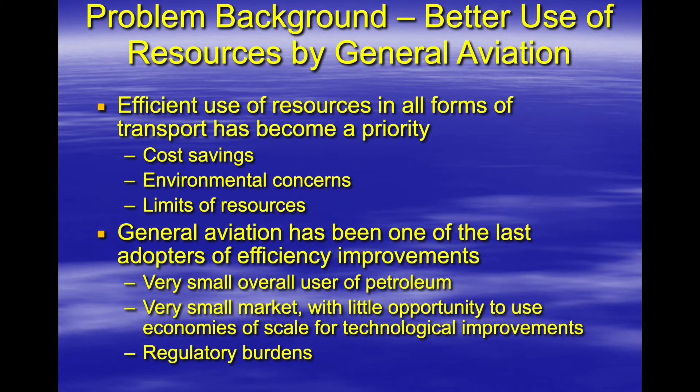But there are some more efficient airplane engines that are being worked on at this time. A couple of them, the diesel engines that you're seeing coming out in airplanes like the Diamond Twinstar. That's the compression ignition or diesel engine.

The interesting thing on the engines for this particular airplane, they're about 170 horsepower or so, but they're kind of heavy. As you can see, that's quite a bit heavier than an O-360. But the real deal on these, of course, is the specific fuel consumption, 0.38, and that's pounds per horsepower hour, the units. And it's pretty good compared to a gasoline engine, which is about 0.48, and they can even be higher than that, 0.55 or so.

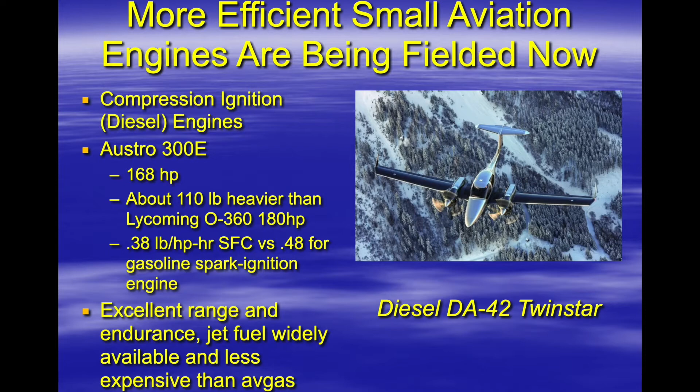Turboprop engines can be more like 0.6 and higher. So these diesels are very frugal. They have real good range, and the jet fuel, of course, if you bought that, is a little bit less expensive than aviation gasoline. So that's a real efficient engine. And there's some other really neat things coming down the pike.

Electric engines for airplanes. They will be fielded in the future, but there are many ongoing efforts to test right now. This picture here is the MagniX eCaravan. It just flew a few months ago, and that is Moses Lake, Washington, the airport there in the background. The neat thing about these electric motors is that they have a very high conversion efficiency. So of the amount of energy you're carrying, about 80% of it gets converted into power, at least coming out of the electric motor.

But the real deal, of course, is that the batteries are still really heavy for the amount of electricity they hold. If you wanted to make a comparison, a gallon of gasoline has about 34 kilowatt-hours of electricity if you do a direct comparison. But batteries that can hold 34 kilowatt-hours are about 60 to 80 or 100 pounds or more, so it's like 100 pounds a gallon. Of course, you get real good conversion efficiency, but the range is not quite there yet.

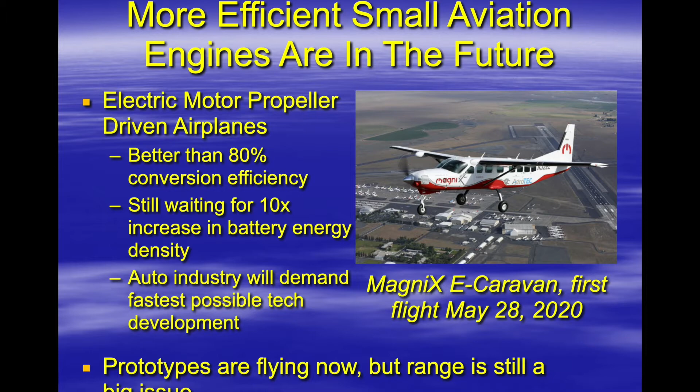We're going to see some big improvements on that because the auto industry is extremely competitive, and they're really driving to get the battery energy density up and the weights down, and we're seeing some neat changes in that. So range is still an issue, of course. They'll eventually get that.

But regardless of the propulsion engine type, you still have an engine providing torque into a propeller and providing thrust and power to an airframe. And you really need to be efficient to be able to fly these efficient airplanes, efficient pilots. And there are some flying and flight planning techniques that you can use to get better efficiency out of your airplanes in the future, and you can do it right now in your own airplane. It doesn't cost you anything. And here we go. Here's how you do it.

So first of all, when you're talking about efficiency, what is that? People tend to think that efficiency is miles per gallon. They really only look at the fuel side, but there's more to it than that. Is speed a factor? That is the question. And you fly max range, max endurance. Where's the balance there? So there was a great paper that was done by Gabrielli and von Karman back in the 50s. It's called What Price Speed. This little graphic here is from that paper.

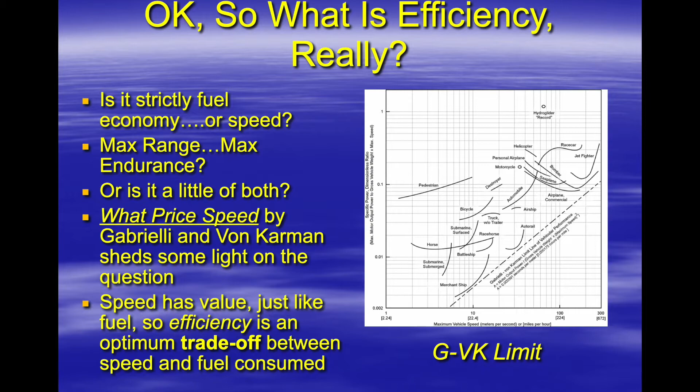The bottom line for this is that speed has value. Speed has value because of the value of time. So we actually put a value on speed, just like fuel. And so efficiency, as opposed to sustainability, is an optimum trade-off between the speed you get and the fuel that you use. So like many engineering things, there are trade-offs there. So that's what efficiency really is.

And using those concepts, a fellow named B.H. Carson published a paper in 1980 called Fuel Efficiency of Small Aircraft. And this is an AIAA paper. If you look at the chart here, a lot of you folks have seen this. The upper one is a power versus speed chart, maximum endurance at the bottom of the curve, and maximum range where the curve touches the line coming from the origin. So maximum endurance, maximum range.

Now, if you change the y-axis a little bit here and put that into thrust instead of power, you can do a very similar sort of graphical determination there. Maximum endurance is still at the same speed. Maximum range now actually comes at the bottom of the curve, as you can see. And that tangent line is now called the optimum cruise. And that was called Carson's speed.

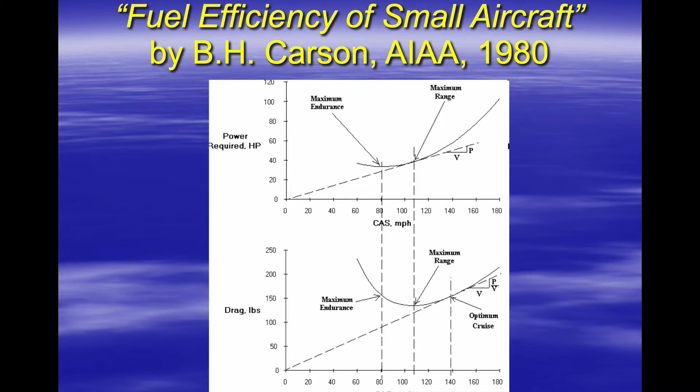There's another look at it here in a little bit larger view, and these numbers will be relevant a little bit later. Again, you have the drag or the thrust there. It's not power on the y-axis, it's thrust as a force, and then your speed. Best rate of climb, roughly, maximum range there, 95 knots or so, and then the Carson speed there. Again, is about 123, 124 knots or so. Again, that tangent line goes down to the origin. It's not shown on the graph here because we wanted to zoom in a little bit.

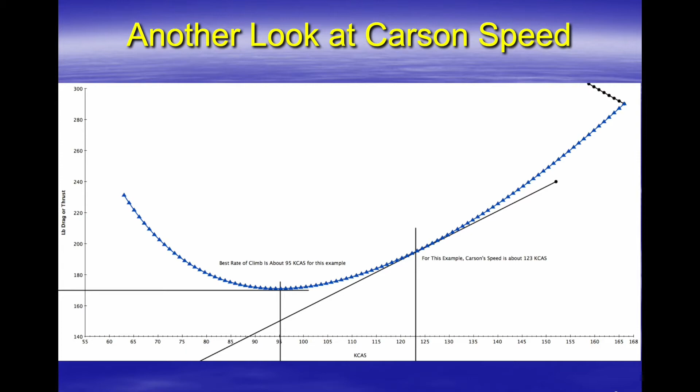So Carson's speed is basically the instantaneous airspeed where the product of your velocity and your miles per gallon are maximized. So again, these are trade-offs. As speed goes up, miles per gallon goes down eventually, at least on the front side of the power curve there. And if you maximize that expression there, speed times miles per gallon, that's Carson's speed. And he called it the least wasteful way of wasting fuel.

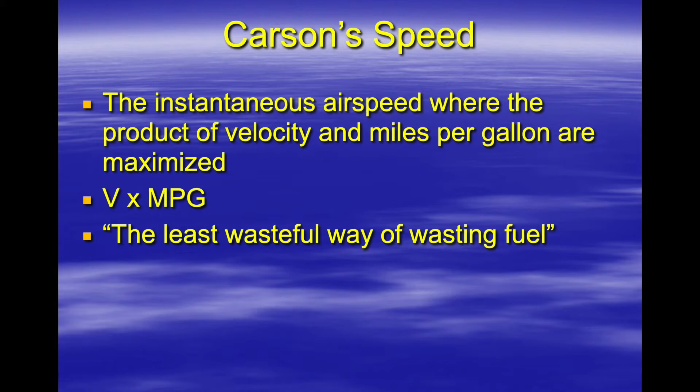And there's some other interesting relationships if you do this mathematically. Sorry, have to do it. When you raise a value to an exponent, there's some interesting things that can go on here. So if you use v to the -1, which would be maximizing the miles per gallon divided by velocity, that's your maximum endurance speed. If you maximize v to the 0, which is 1, which is maximized miles per gallon, that's maximum range, obviously. And kind of close to Vy, which is your best rate of climb, roughly.

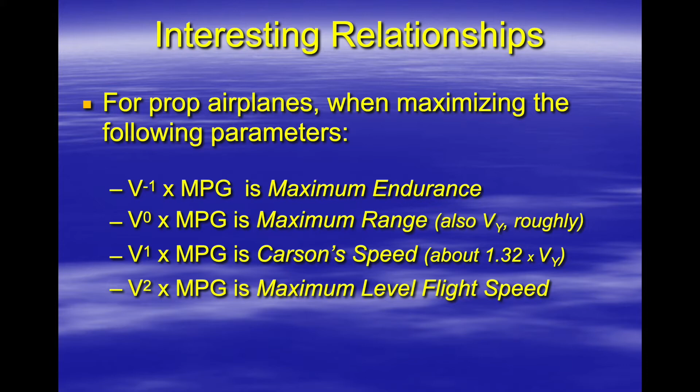It's kind of rough. Carson's speed is about 1.3 times your Vy speed, roughly. Again, that's v to the 1, or v times miles per gallon. You maximize that. If you maximize the product of velocity squared times miles per gallon, basically that's as fast as you can go, because that square term is very powerful mathematically. So those are the relationships there for those of you who like to see that.

But guess what? Most of you probably have never even heard of Carson's speed. And the reason for this is, even though this paper was published in 1980, this concept really hasn't caught on. A few people talk about it in some of the various forums. But the real issue here is that when you cruise at this speed, you're only using maybe 50 to 55% of the power in the airplane. And the winds can overwhelm that for long cross-country planning.

And your specific fuel consumption, remember I talked about that earlier, for regular spark ignition piston engines, as opposed to compression engines, that's a diesel, is a little bit lower when you're around 65% power. So if you're looking for good specific fuel consumption, again, in a no-wind scenario, about 65% power is actually where your best specific fuel consumption comes in. And of course, people will say, I didn't buy a Bonanza or a Cirrus or a Mooney or build an RV or an SX300 or EZ type to go slow. So this really hasn't caught on all that much in the community.

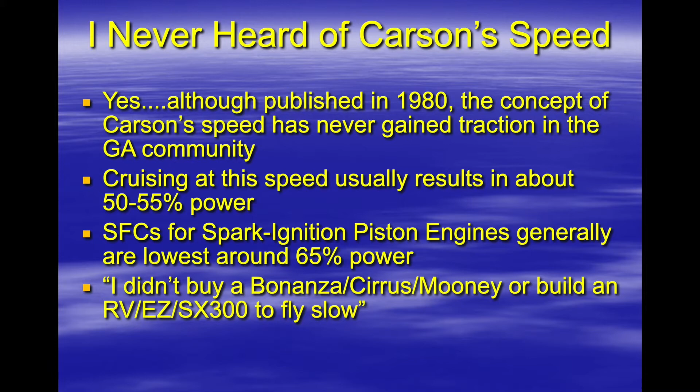So maybe Carson's speed for cruise isn't the greatest measure of efficiency, this v to the 1 times mpg. If you maximize that, you get basically lower than desired cruise power, because it doesn't work well in the real world. So the CAFE Foundation, the Comparative Aircraft Flight Efficiency Foundation, if you recall, was formed in the early 1980s by Dr. Brien Seeley out in California. They ran a whole series of efficiency air races and did a bunch of other flight research. And they spent a long time thinking about this efficiency issue.

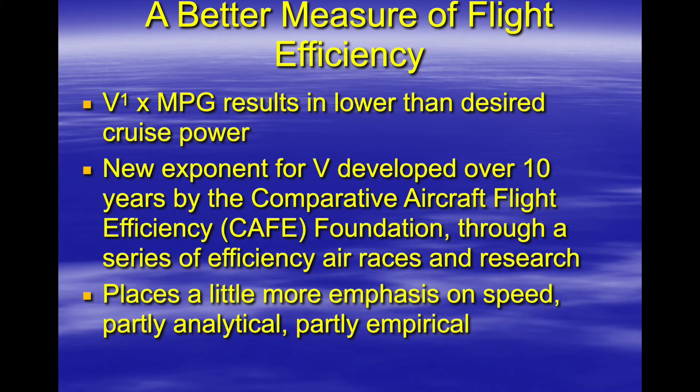And they came up with a different exponent for this velocity term, that put a little bit more emphasis on speed. There's a real long derivation of it. I won't bother you with it, but part of this is analytical, part empirical. At any rate, here it is. So the CAFE parameter, when you're looking at the efficiency of an airplane, the number you want to maximize is your velocity made good raised to the 1.3 power times miles per gallon. This is the measurand of efficiency. If you can maximize your CAFE parameter, that's your best efficiency.

And the reason you use velocity made good is that's the actual speed that you get between your departure and your destination, because what really counts is point to point. Instantaneous velocity is nice for theoretical people, but we're flying airplanes to go from point A to point B a lot of times, and so velocity made good is a better term here, and it allows you to evaluate a flight for non-constant true airspeed, and it also allows you to evaluate a flight for winds. Because as I said before, flight planning for your cruise has a huge impact on the overall efficiency of your flight.

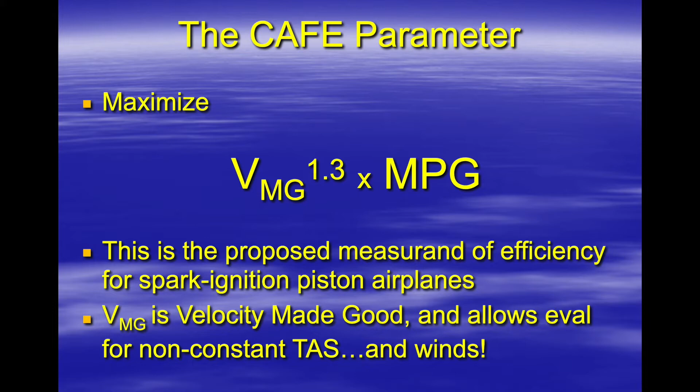So Carson speed still has merit, though, but not really as much as a cruise speed. My idea to come up with this for my master's thesis started from this book here, Logic of Flight by Jack Norris. He talked a lot about cruising at Carson speed, and again, we've shown that that's maybe a little bit too slow. He also talked a little bit about climbing at Carson speed, but he said basically climb until the airplane won't climb anymore.

And he also didn't really discuss any considerations for cross-country planning with respect to winds. And that all really needs to get into the thought process. So when you're flying at Carson speed, you're using about 50 to 55% power for moving forward, as I said before, but then you use all the rest of your power for climb. And you don't want to fly this 25 square thing. People get taught about that. I'm going to show you later on that it really hurts your efficiency, and I'll show you that here in a little bit.

So, rather than climbing until the airplane doesn't climb anymore, what I thought I would do is put a performance limit on there and actually make this climb a profile instead of just a constant speed. And this is similar to what we see in some of the larger airplanes. And the nice thing about changing your profile when the airplane reaches a climb performance limit is that the airplane tells you when you need to make a little change in your climb profile. You don't have to do any computations for different weights, or if it's hot or cold, or if you have winds or any of that sort of thing. That's different from what Norris did, and added quite a bit to the definition.

So as you recall from your training, there's a couple of FAA-defined V-speeds. VX, of course, is the best angle of climb, and that's the best climb that you get when you're flying your airplane to go forward. And VY is best rate of climb. That's the best climb per unit time. So distance-based for the first one, time-based for the second one. So now, logically, we would go to VZ. VZ is currently an unassigned term in FAA vernacular, and so I claimed it in this paper in order to represent the best efficiency of climb. So it's a climb profile. It's not really a constant speed, and here's how you do it.

VZ is about 1.3 times your VY at your maximum continuous rated power. No 25 square, as much as you can get out of the airplane in its certification basis, that's what you use. And now here's where the performance limit comes in. You climb at this speed until the airplane will not climb any faster than 500 feet per minute. So then you change from a constant speed climb to a constant vertical velocity climb. So you maintain 500 feet per minute climb. While you're doing that, the speed's going to slowly decrease a little bit. And then when the speed gets to whatever your VY speed would be for that altitude, then you just maintain your VY and climb at that. So it's a profile instead of a constant speed.

And here's how you manage the power for your normally aspirated engines. You use the target EGT method of mixture management for most efficient operation. In a nutshell, you take off at sea level full rich, and then around 2,000-3,000 feet or so, and every 1,000 feet thereafter, you lean the mixture a little bit in order to go back to the same EGT that you see on a sea level standard day, and that way you lean just a little bit and climb. If you search on that term, target EGT mixture management, you'll find a number of good presentations on that. But that's how you get the most efficient operation.

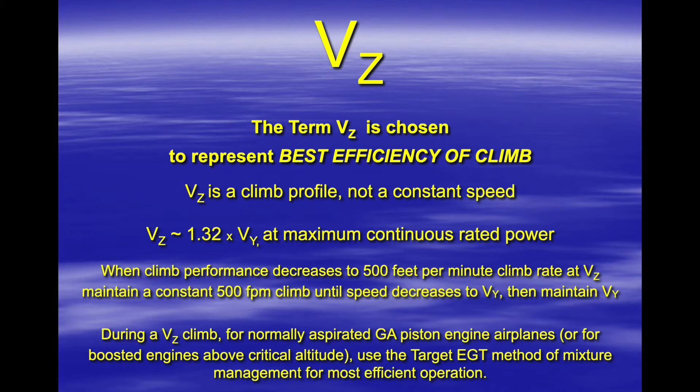But it doesn't really make any difference there. There are three things that have to work for this to actually be a useful term. One of them is technically rigorous, so it really is the most efficient climb, and use the CAFE parameter that I talked about before to evaluate that climb. And then, can you define this climb in regulatory language? And then, can it really be flown by ordinary pilots?

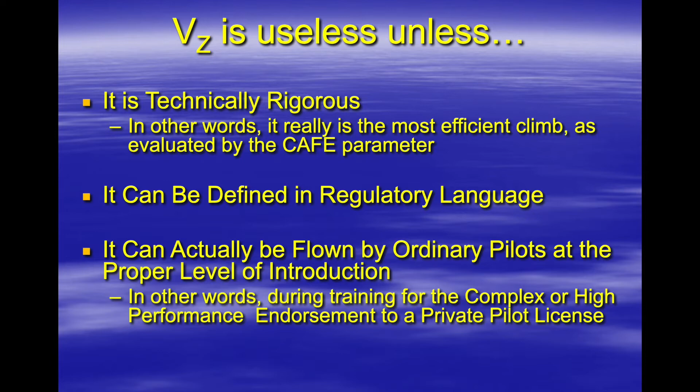The idea for this is you would introduce VZ in flight training at the time that you're going to get your complex or high performance endorsement for a private pilot license. So the difficulty of this particular maneuver has to aim at that population. So that's the idea there. So we need to satisfy all three of these things for this to actually be a viable concept.

And when I was working on this project, this was where I really ran into some problems, because it'd be nice to have a computer model or simulation of airplane performance that could account for this profile change. And the more I looked into it, the more discouraged I got, because it was a very difficult modeling problem. Charts don't really work. Even some spreadsheets that I'd seen didn't really account very well for propeller performance and efficiency.

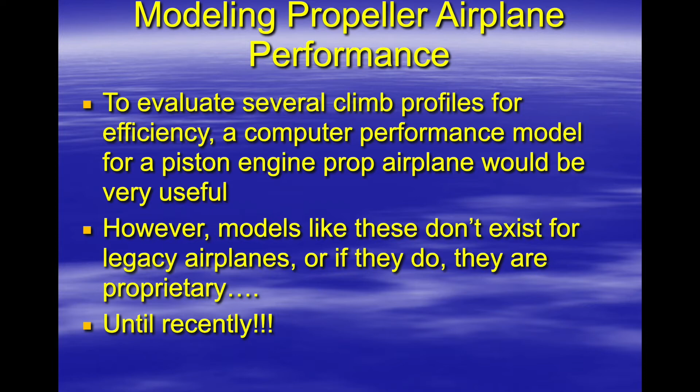So Benchmark was written by Alfred Scott. He's the president of Sequoia Aircraft Company, the guys that came up with the Falco airplane, as well as the Sequoia, which was a kit built similar to the Falco. A couple of consultants on this program: Finn and Dorothy Taylor are legendary in flight test circles. They were the primary flight leads on Mooney, working with Roy LoPresti back in the 70s, doing flight tests. Huge history. They're giants in the industry.

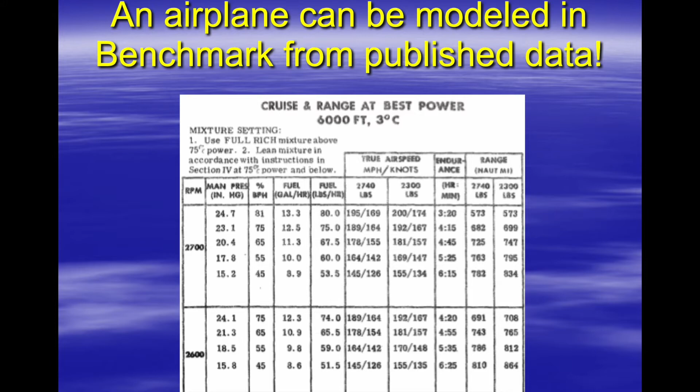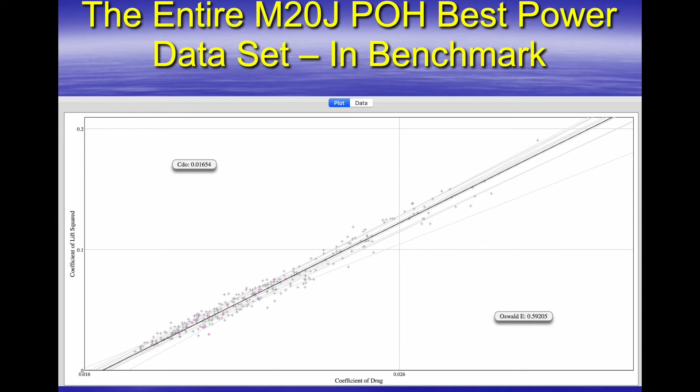So here's all these numbers, and people normally don't look at all this, but I grabbed all of them. In fact, the entire pilot operating handbook, every line of data I put into Benchmark, and all those little pluses are a line from the POH that have been put into Benchmark and then result in a drag and lift curve that you can use in order to predict performance. So at any rate, that's what that is. The line there kind of is the best fit to the data, and that was a lot of work.

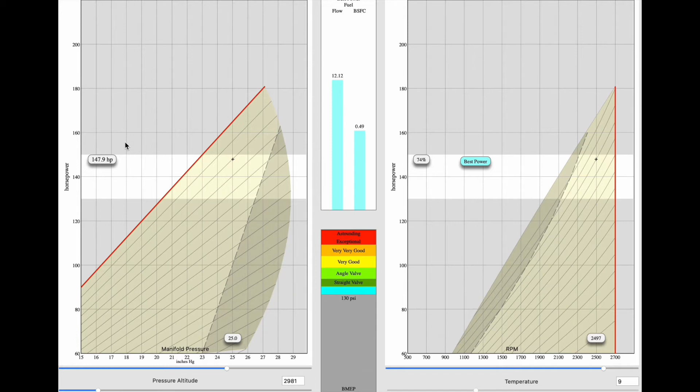I got about 148 horsepower. So before, climbing at 3,000 feet, I had 180 horsepower going into the prop. Here I've only got 148. Now let's see what happens when you go to fly the prop. Okay, here is the prop now. Again, this is modeled from a Mooney. It's a McCauley 2-blade propeller. You can see where the cursor is pointing there in the lower right.

That's your 148 horsepower going in, and I'm climbing at best rate of climb. That's 86 knots indicated airspeed. And now we're going to see what happens here. At 3,000 feet, there's 2,500 RPM. About 77% efficiency on the prop, but they're at 86 knots. There's the percentage. And you see now my 200 horsepower motor is only putting 115 horsepower in the prop.

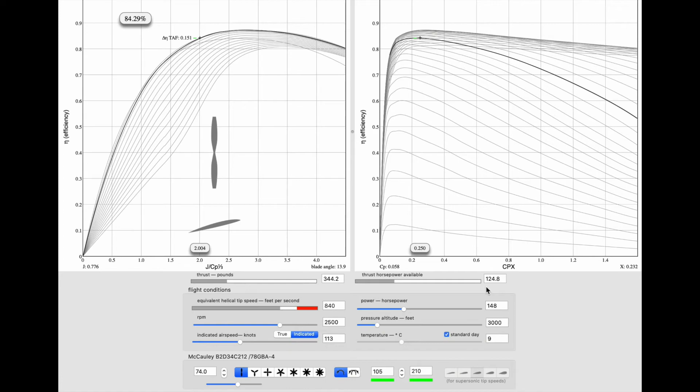If I increase to the VZ profile there, 113 knots, I get a little bit more power. It's 125 or so, but it's not 150. And that's what the guys are seeing climbing out at the higher speed with full power. So again, 200 horsepower airplane. You're at 3,000 feet climbing. If you're wide open at 2,700 and you're flying a VZ profile, again here for the Mooney, 113 knots calibrated, you're getting 149 horsepower out of the prop.

If you're a 25 square guy and you're slowed way down at your VY trying to climb, you're only getting 115 out. If you speed up a little bit, you're getting about 125 horsepower out. But your rate of climb isn't very good here because, again, you use about 50 to 55% power to move the airplane forward at 113 knots. And in this case, this would be about 110 to go forward. So you're only climbing with about 15 horsepower. So basically 25 square just destroys your low altitude climb performance.

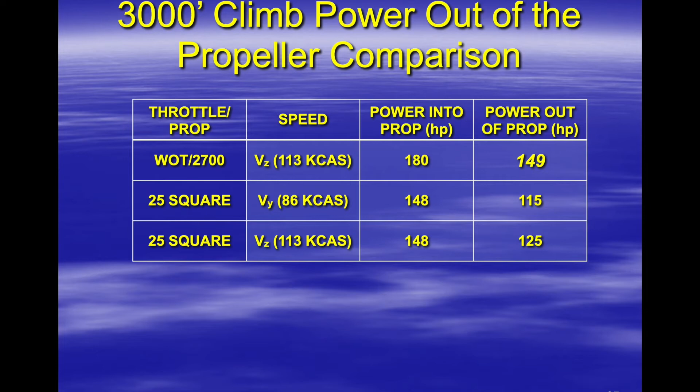And I would advocate, if the airplane certification basis allows, use full power for climb. And if you have trouble with overheating, then you should look at your cooling baffles and how you manipulate your cowl flaps if you've got those. At VZ, you shouldn't have as many cooling issues because you're quite a bit faster than the certified limit. For the experimental guys, you may have to work a little bit. Hopefully you don't see overheating, but this is kind of where you want to go.

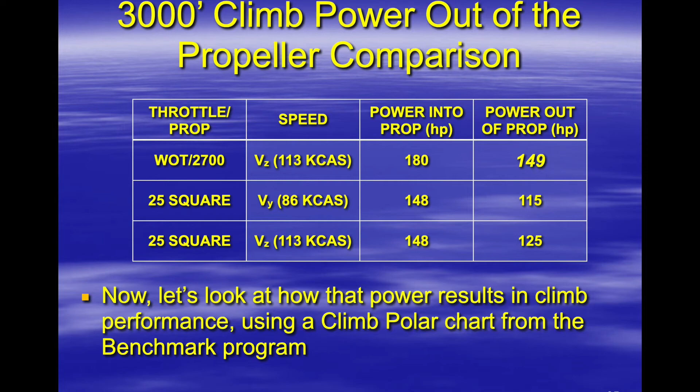So let's look at this. Let's see what this power does for climb performance. And now we're going to look at a chart that Benchmark produces called a climb polar. A lot of people may not have seen this before, but it is in your pilot operating handbooks if you have a certified airplane. I'll show you that here in a second. So this is the climb polar. This is an interesting chart: time, distance, and fuel used to climb.

And when you see that there, the bottom is either time, distance, or fuel used. The y-axis there on the left is altitude. And if you look where this little blue plus is on that big curve, that's the target altitude there. That's showing 8,000 feet. There are some mini charts here. So this airplane right now is at best rate of climb speed, full power, in a Mooney.

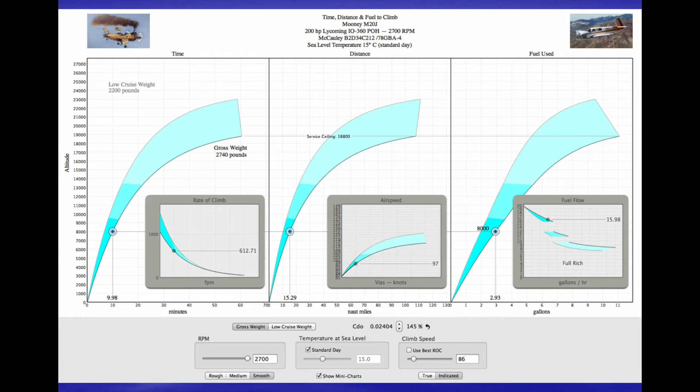If you were at best rate of climb speed, or actually a little bit faster here, at 8,000 feet, you can expect to be climbing about 600 feet per minute. And this particular data would be discernible from the pilot operating handbook, but it only gives you this one speed. It doesn't let you really change any of the other parameters.

This is a close-up of the time to climb chart. Again, 10 minutes to 8,000 feet, and your rate of climb when you get there is about 600 feet per minute, so you're still climbing a little bit there. The lower curve there is at maximum gross weight, and the upper curve there was when you're lighter. You can obviously climb faster, so it's a little bit different curve, and all your different weights kind of lie in between there in that blue arc.

Now, I was curious how accurate Benchmark was with respect to the published data for the Mooney. So what I did is I superimposed this chart at the same scale to the chart that's in the Mooney Pilot Operating Handbook. And as you can see, it's almost an exact match. If you can see underneath there the chart from the Pilot Operating Handbook, it starts to diverge a little bit above 13,000 at gross weight.

And the line for Mooney there, from the book, is 2,300 pounds, the upper one, and then the big line that goes above that's 2,200. So you can kind of see where those would fan out. This tells me that Benchmark was pretty darn accurate and does match the published data for that model. But the cool thing about a model versus a chart is then you can manipulate it just like we were flying the engine and the propeller earlier. So that's what we're going to do now.

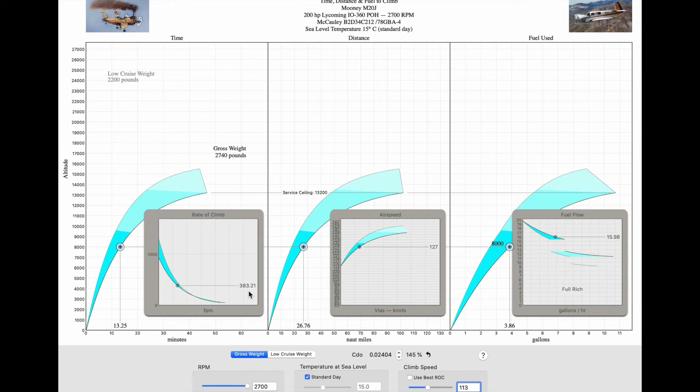So I'm a little bit low on the VVI, so I should lower my altitude here to predict where I'm going to transition from climbing at 113 knots to climbing at 500 feet per minute. And in this case, you can see it's right around 6,000 feet or so is when I do this transition. So that's a big deal there. And again, you think about the constant airspeed climb, then a constant VVI climb when you see 500 feet per minute.

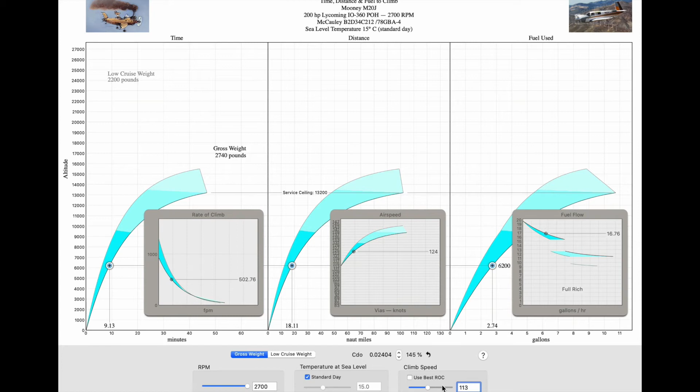Now, the neat thing about this is I don't have to do any flight tests for the calculations in order to prove that I have the efficiency from this profile, because I can do this by model. And I can run all kinds of predictions with this model just by manipulating these charts. This particular capability never existed before this project. No one had ever done it before. In fact, it wasn't even in Benchmark, and I worked extensively with Alfred Scott to develop this capability in this program, and it's really cool.

So basically then I could figure out time, distance, and fuel for a profile using this model, and then start looking at baselines and get a prediction on how sensitive this technique might be for actual pilots to fly. So you run the profiles, figure out how far you go, how fast you got there, and how much gas you used, and then use that to compute the CAFE parameter.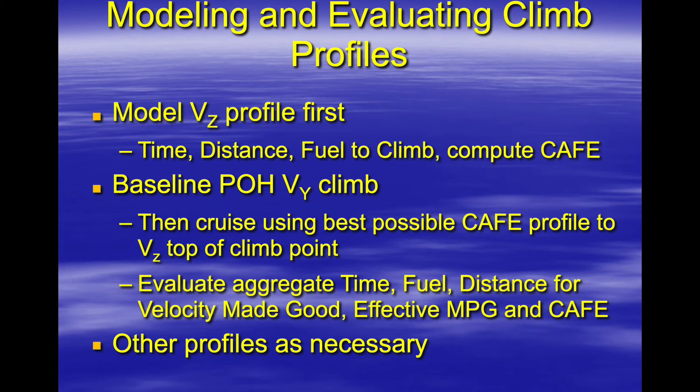It took from near sea level to 8,000 feet. Actually, this is a model 0 to 8,000 foot climb. So standard day, gross weight, Mooney, 0 to 8,000 feet. It takes 12.8 minutes to get to 8,000 feet. You go 25.5 miles downrange.

You use 3.4 gallons of gas to use it. There's your nautical miles per gallon. And then remember, CAFE parameter is the velocity made good times the MPG, in this case, nautical miles per gallon. So that's the score, 3812.1.

Now, if you follow the POH, you fly at VY at full rich. Take you 10 minutes. Remember that? We saw that. 10 minutes to get up there, 2.7 gallons, and you go downrange 14 miles. Okay, but you're only 14 miles, so you need to get back to the same point in the sky as the VZ climb. So now you just cruise down there.

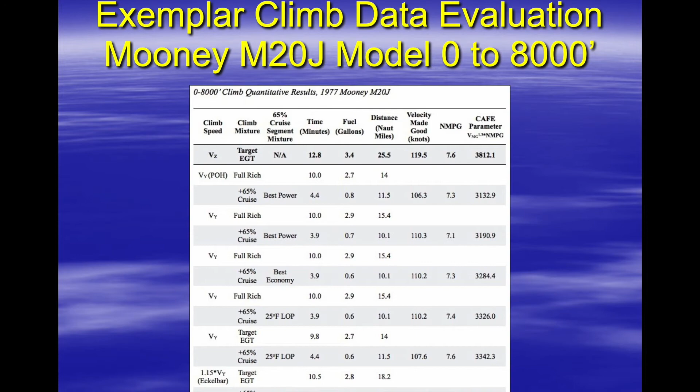And so what that immediately shows is that the technique is a little bit less sensitive to speed. So you don't have to nail the speed. And in fact, if you fly that speed pretty close to what you would expect a student getting their complex rating to fly to, which would be +10 and -5 knots, that's in the ACS, the Airman Certification Standards, you'll still get the results that you're looking for. So that really is neat, because now it can be acceptable in a regulatory sense, because you can still get really good results and still apply it to that pilot population.

But the next real question is, is this profile really flyable? You don't want golden hand test pilots to be the only ones able to fly this thing. It's got to be flown by a private pilot that's going for a complex or high performance rating. So the idea here is, once I got all the models done and the regulatory stuff, is to actually go do a flight test, and the flight test would anecdotally gather some performance data. But the real thing is more of a flying qualities and workload evaluation. Is this really flyable by an ordinary pilot with ordinary skill?

The Cooper-Harper rating scale is a practice used in flight test to evaluate flying qualities. In a nutshell, you have a task, and if you're really good at it, you can meet a desired criteria for performance or accomplishment of the task. And then if you're adequate, that means it's kind of hard to do, but guys can do it. And if it's completely unsatisfactory, you can't do it at all, and those are the lower scores.

So a 1 is the almost impossible good rating. A 3 is pretty good. When you get to 4 to 6, it's not quite so great. But the adequate criterion basically is, can you maintain your speed +10 and -5 knots when you're flying your VZ profile? And that points exactly to the Airman Certification Standards. So is that flyable? Can you maintain that speed?

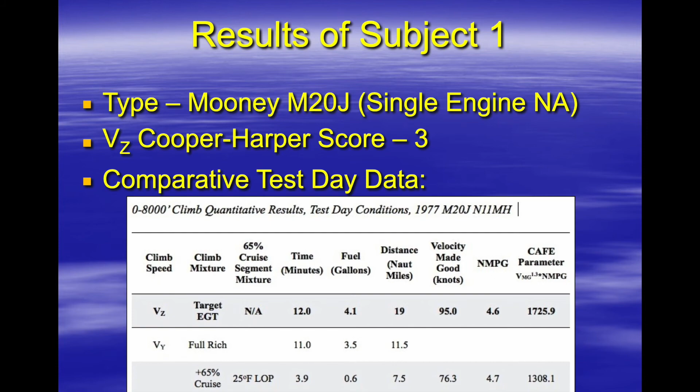We did run the numbers here. If you look at that, you'll see those CAFE numbers a little bit lower, primarily because of the headwind that we're climbing into. But when you look at that, the real interesting thing is it took about the same amount of gas to get to that 19-mile point. But using VZ, you got there at 95 knots, velocity made good with the winds, and VY about 76. So same point in the sky, same gas, 20 knots faster. I call that a win.

The results are promising. I got ratings of 3 from 3 different pilots flying 3 different types of Mooneys. And I used this technique personally in our Mooney and the Aerostar 601P. I actually rated it as a 2 in the Aerostar because the airplane's so easy to manage from a power standpoint. And a lot of the comments I got from the pilots was it's really no harder to fly than

a VY climb. It's really easy to see the transition to vertical velocity when the performance drops down. I was a little worried about that, and they said it was really easy to see. And of course, less rudder needed on the climb out for side wash, that sort of thing. So people seem to like that.

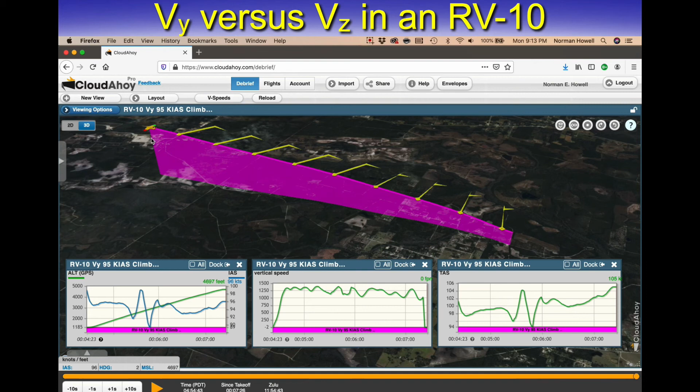And as you climb, of course, at a constant indicated, the true airspeed will start to walk its way up. And at the top of the climb there, you can see he's still doing a really good job holding 95 knots. The true airspeed is now 105, so he's starting to get down a little bit and down the road. So that's a VY climb in CloudAhoy with an RV-10.

So that was kind of neat to see using CloudAhoy. I love this program. Everybody should have that. You could do all kinds of flight tests with this. Its potential really hasn't been fully explored. There's a whole magazine series you probably could write with this program for Phase 1 flight test.

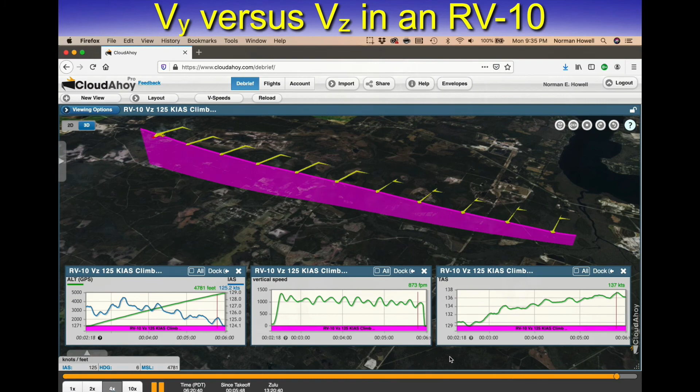And I fly this a lot. I published this in the Aerostar magazine and on the forum, and there are lots and lots of people in the Aerostar now that are using this climb profile. And because the airplane is turbo normalized, it really doesn't run out of climb performance quite as fast. You can get to a really high altitude, and a really long way downrange as you climb to altitude. This airplane's a 601P. It's really happy at 19,000 feet, so that's the target altitude I use for flight planning and vary from there.

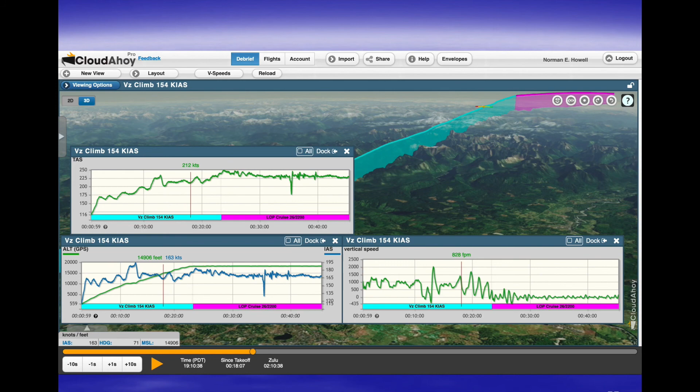So 154 knot climb, and then I go to an LOP cruise. The cruise numbers for this airplane: 26 inches, 2200 RPM, 26 gallons an hour total fuel flow, 25 degrees lean of peak, and about 210 to 215 knots, depending on the temps. So we're just going to bring this up. But again, the astounding thing is this really high true airspeed, and it really picks up as you get to altitude in the turbo airplanes, because the difference between indicated and true starts to become really stark. And it really pays off in these climbs using VZ for the higher performance.

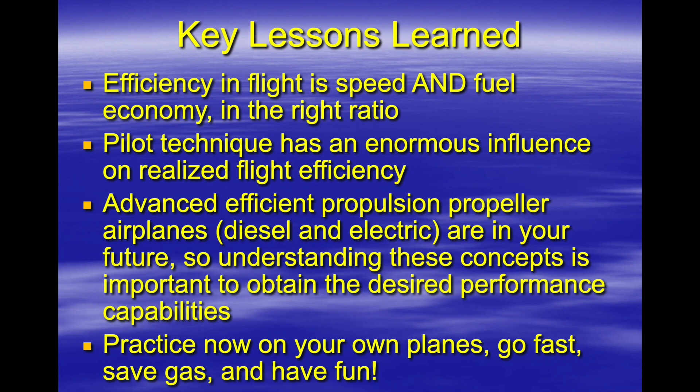So again, the lessons learned here: efficiency in flight is a combination of speed and fuel economy in the right ratio. Hopefully you've taken away from this that your technique has a huge influence on how much efficiency you get out of your flight. There's better engines coming, and so the better that you can fly your propeller and fly your airplane, you'll be able to get the desired performances that you want. But you can practice right now. It doesn't cost you anything to do this. You can go fast, save gas, and have some fun. So what I say here is that better performance is available from your airplane right now for free. The only thing you need to do is STC your brain.